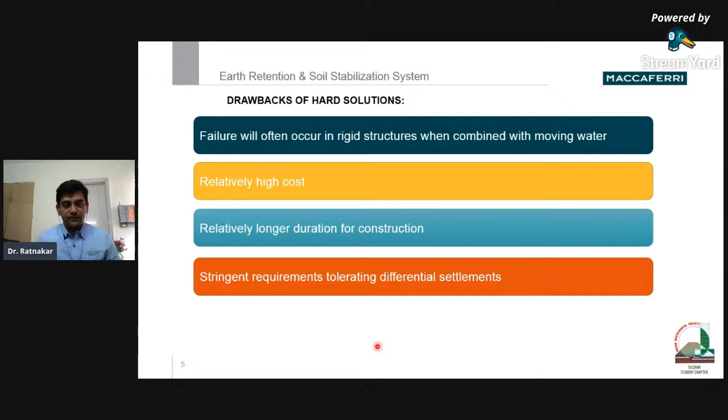As we discussed last time, earth retaining structures are either externally stabilized or internally stabilized, and externally stabilized structures are the gravity walls. In gravity walls, you have mass concrete, cantilever, and gabions. These typically are walls where you have filling done behind the wall.

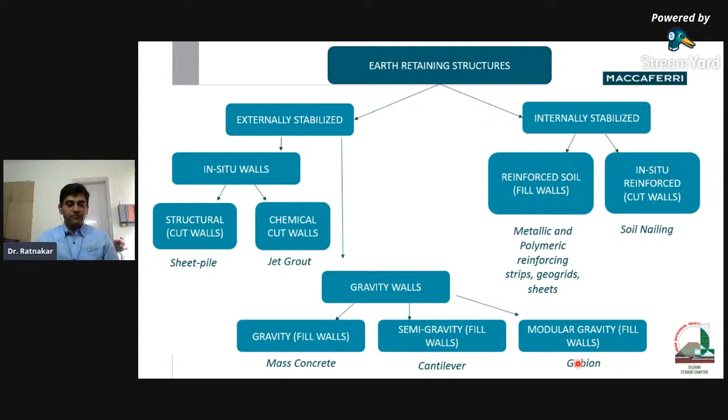In such cases, the gabion walls are being used. Now, before going ahead with gabion walls, let's understand what are the types of gabions.

I'm sure you must be aware of the history, but I will briefly mention it. Engineered gabions were invented around 140 years back by Maccaferri, in the application of riverbank protection. The word was Gabbione, and there was a patent for some time, and then the use of gabions spread not just in Italy but all over the world. Different forms of gabions have been used.

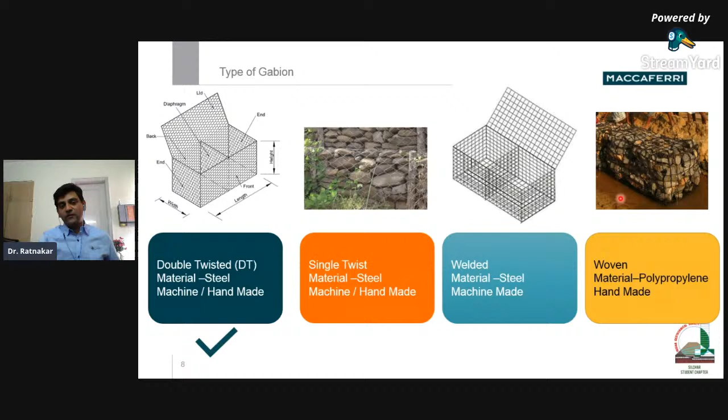Secondly, with a polymer rope gabion you don't have much stiffness, so it cannot maintain the intended shape. Typically the box kind of shape achievable in a double twisted mesh gabion or welded gabion may not be achievable specifically in a polymer rope gabion, nor with a single twist gabion.

Now, after understanding the types of gabion, it is very clear we are going to talk about double twisted, mechanically woven, machine made gabions. So what are the components of gabions?

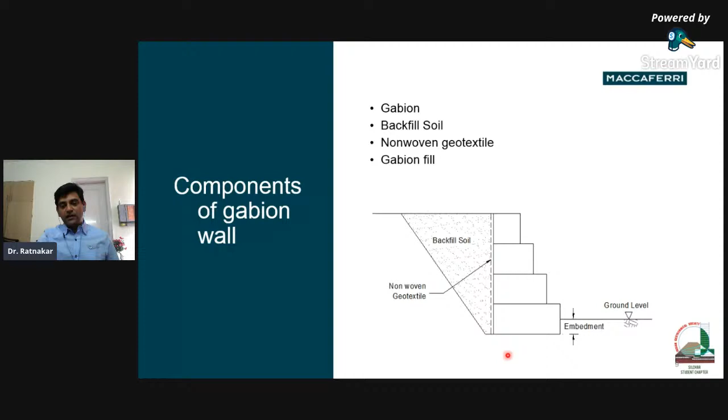Typically the first component is the gabion itself, like the number of gabions here. Second is the backfill soil, the soil which you are going to put behind it. Next is a dotted line representing a non-woven geotextile, which acts as a separator and filter. Then there's the gabion filling material, and the gabion wall rests on a certain foundation.

Let's look at these different components one by one. Gabions are rectangular cages made up of woven steel wire mesh, typically double twisted wire mesh. They have side panels, end panels, and top and bottom panels.

Diaphragms are provided every 1 meter to separate the number of cells. Lacing is used to join the lid with the sides of the gabion using a steel wire, and there are also selvedge and edge wires. That's what makes up the components of the gabion.

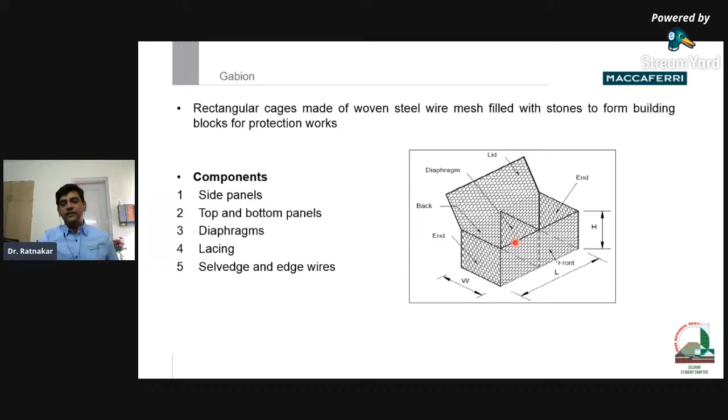This double twisted wire mesh is manufactured in many different sizes, allowing different fields of use and different structural strengths to be achieved. This is a double twisted hexagonal wire mesh. If you load these hexagonal wire meshes, you find there is a better stress distribution in hexagonal shape compared to rectangular or square shape.

What are the different mesh sizes of this steel wire mesh? Typically 6 by 8, 8 by 10, and 10 by 12 mesh types. The 6 by 8 refers to a mesh opening of 60 millimeters or 6 centimeters, 8 by 10 refers to a D value of 8 centimeters or 80 millimeters, and 10 by 12 refers to a mesh opening of 10 centimeters or 100 millimeters.

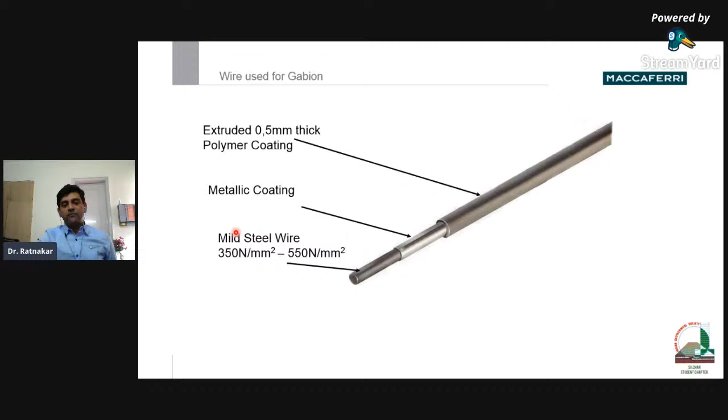These gabions are made with steel wire. You have a mild steel wire which has a tensile strength of 350 MPa to 550 MPa.

The requirement of this steel wire is usually that the elongation at break shall be more than 10%. This steel wire, if you are going to construct a structure with it, has to be durable, and there are possibilities of corrosion.

So corrosion protection is provided with a metallic coating. Typical metallic coating is basically galvanization using zinc, or now there are advanced coatings of zinc aluminum alloy, referred to as Galmac coatings, which have 3 to 4 times more resistance than just zinc coating. On top of that, polymeric coating is extruded, since even the metallic coating of zinc or zinc aluminum can also get corroded. So on top of that, a polymeric coating is provided.

This polymeric coating can be of a polymer which is flexible, which can sustain abrasion, and which can sustain the environmental conditions to which it is exposed. That's how you have the first layer of protection of polymeric coating, then a metallic coating, and then of course the wire itself. That's how the gabions are being made.

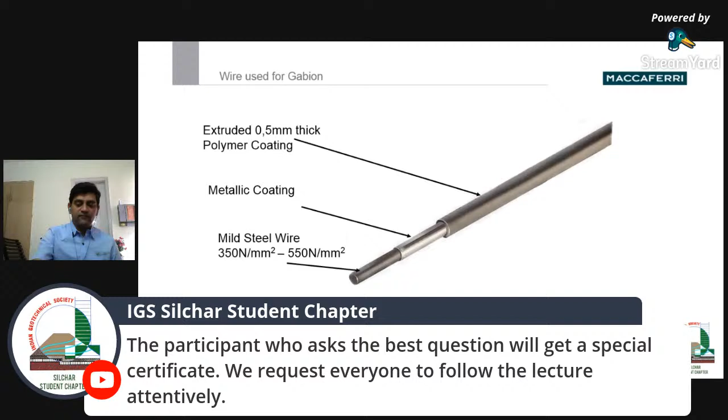Now these gabions have certain dimensions - length, height, and width. Typical length of these gabions varies from 2 to 4 meters. This is for standard gabions of 1 meter height. Sometimes even 1.5 meter long gabions are available, typically in 1 meter height. So for 0.5 meter height, typically you will not have this 1.5 meter length of the gabion. For 2, 3, 4 meter lengths, both 0.5 meter and 1 meter high gabions are available.

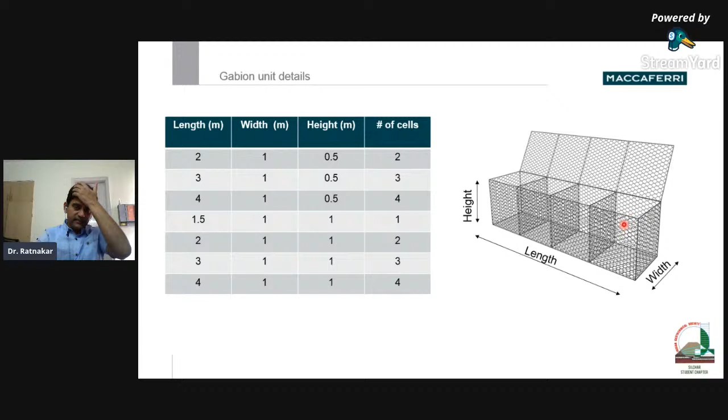So for example, if you look at the 4 meter long gabion like this one - 1 meter in width and 1 meter in height - it will have four number of cells, with three diaphragms separating these cells from each other. That's what the gabions are.

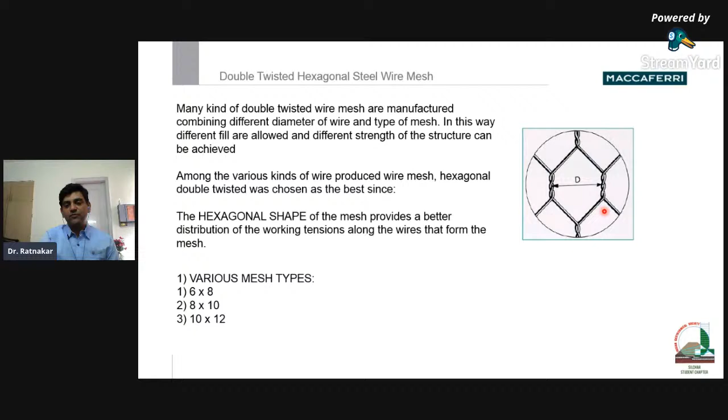Now, after understanding the gabion, let's understand the filling to be used. Typically a rock fill is put in, where the rock size is typically 1.5 to 2 times the mesh opening. So if you have D, the mesh opening of roughly 100 millimeters, you will need a rock of size 150 to 250. The reason for this size is simple - when you have rock in the gabion, if the rock particle is smaller than the mesh opening, it will come out. So for a 100 millimeter mesh opening, you need a rock element more than this, typically 150 to 250 millimeters.

The specific gravity can be 2.3 to 2.6 depending on the type of rock used. When filling these gabions, it is always recommended to overfill. So if this is 1 meter height, you need to fill at least 1 meter plus maybe 1 or 2 inches more, so that when closing the gabion, applying additional stress or force to close it makes whatever stones are inside properly packed. Otherwise, with loose packing, once you finish one gabion and put another on top, the stones in the bottom gabion will settle and you will not have a very good gabion structure - it will basically deform a lot.

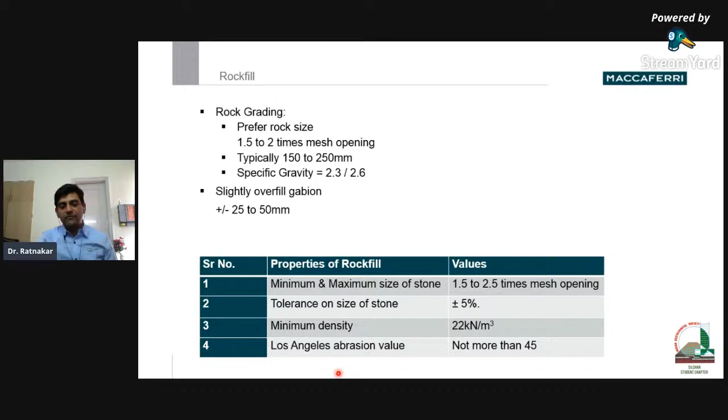That's why you need this. This is a general recommendation, but if you see IRCSP 116, it says the minimum rock fill size has to be 1.5 to 2.5 times the mesh opening, which is what I just mentioned. Tolerance on the stone size can be plus or minus 5%, it cannot be more than that. Minimum density is 22 kilonewton per meter cube, but this is not a fixed or rigid criteria. In case you are in an area where stones of this density are not easily available, you can use concrete cubes, or stones of lesser density, because it is part of the design. If you use lesser density stone, your structure will definitely be bulkier. And the stone or filling must have sufficient durability, which can be estimated through the Los Angeles abrasion value, which shall not be more than 45.

Now moving ahead, the next component is geotextile, which is usually placed at the back of these gabions. The reason why the geotextile is placed behind the gabion is simple.

When you place the stones in this gabion, there will be a lot of voids, typically in the range of 30 to 40%. These are acceptable numbers. You can even fill gabions with 50% or 60% voids, but it is recommended to fill between 30 to 40% voids. When you have a lot of voids, there are possibilities the backfill soil will get washed away, erode, or migrate through gabions and come out. To stop that, you need to have a filter here.

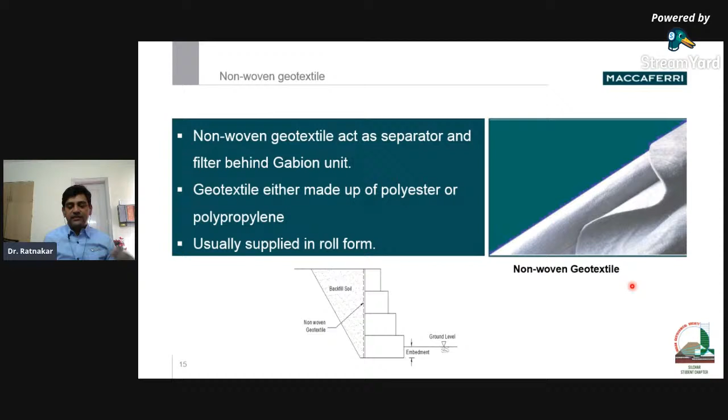That filter can be a simple non-woven geotextile. This non-woven geotextile will act as a separator and filter behind the gabion unit, and this geotextile can be made up of polyester or polypropylene. Usually this geotextile is supplied in the form of a roll, and this is a small component of these gabion walls.

Now after understanding the gabions, the components, and the type of gabions to be used, let's move ahead for the design steps. When you design these gabion walls, they are mass gravity walls, designed by checking various modes of failure, like ensuring the wall is safe against overall failure.

There is no slope stability issue. The wall is safe in the bearing capacity mode of failure, so your foundation soil has enough bearing capacity, the footing has enough bearing capacity so there are no settlements and movements. Also, we have to check that the whole wall, if it is a monolithic unit, shall not slide along the base, it shall not overturn, and most importantly - this is the part which most people don't do or ignore - is the internal check.

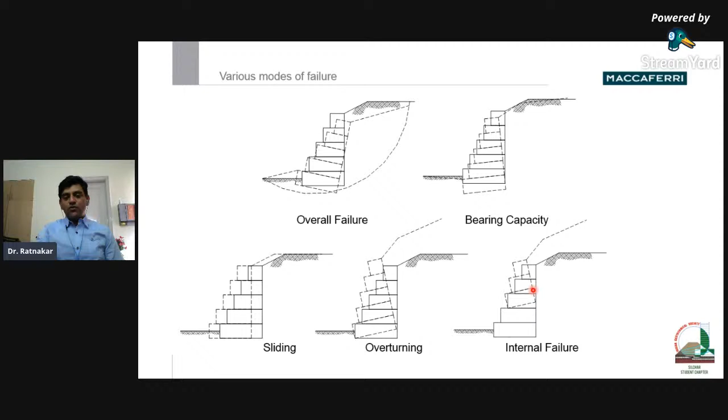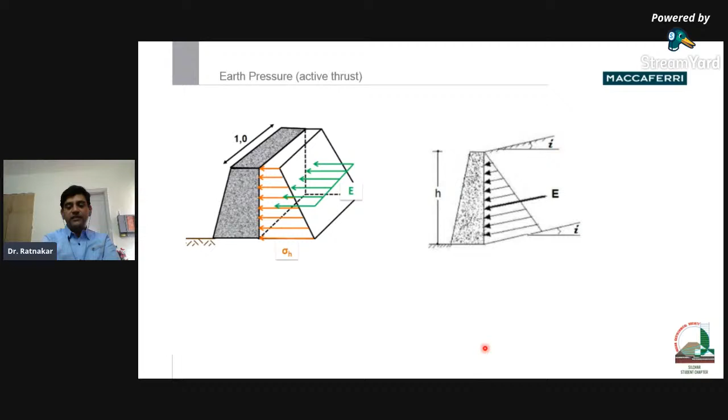So you need to check each gabion for compression and shear capacity. The first step for designing these gabion walls is to determine the earth pressure. We need to estimate this earth pressure based on the various theories available to us.

First of all, let's understand: if you have a soil element at a depth of Z from the top, and look at it from a retaining point of view, you have some vertical pressure, and of course there will be some horizontal pressure. This horizontal pressure is usually governed by the state of stress - typically active state and passive state.

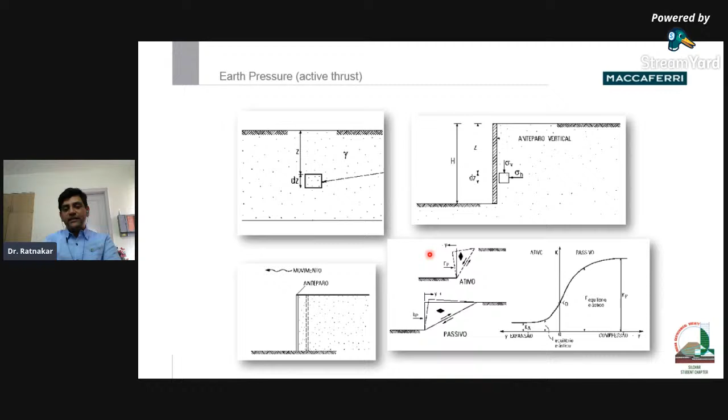When you have a retaining wall moving away from the backfill, or the backfill puts pressure and the retaining wall moves, it can be in active condition. Gabion walls are very flexible, so if there are high stresses, obviously there will be some movement. So in such cases you can use the active condition. Passive would be when the retaining wall is moving towards the backfill - a passive condition has to be used.

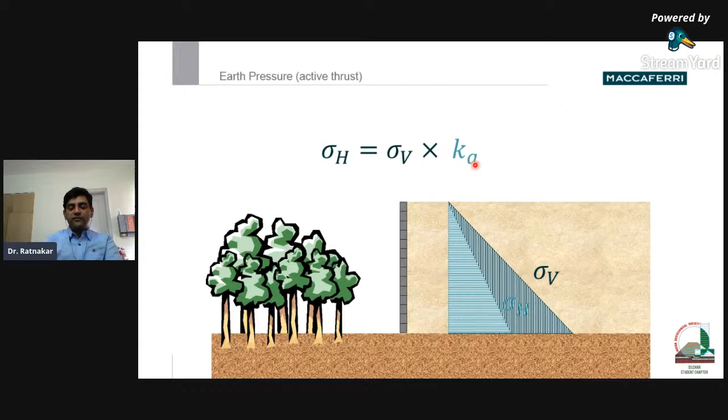For the active condition, you know the height of retention which needs to be retained, you know the density of soil, then you know the vertical stress - that is H into gamma, gamma H is the vertical pressure acting on the foundation. Then you can estimate the lateral pressure by multiplying by a factor called the coefficient of active earth pressure, Ka. For the coefficient of active earth pressure, there are theories available by Rankine and Coulomb.

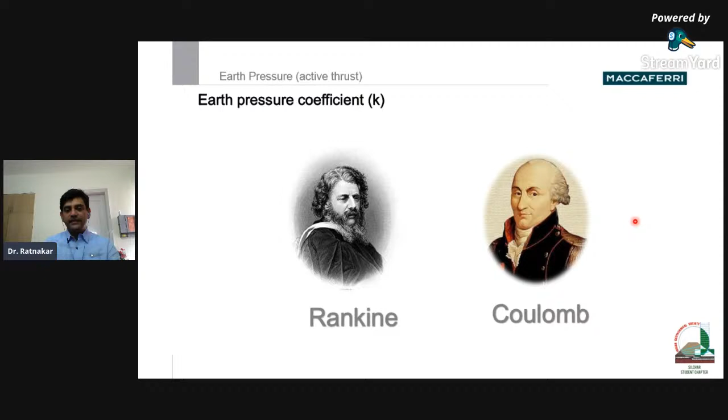It is very clear that when you go for these gabion walls, they are not going to have a smooth interface between this wall and the backfill. That's why you need to consider the Coulomb theory. In the Coulomb approach for estimating the earth pressure coefficient, you assume a wedge at an angle theta, where the mass of this wedge is W. Then you have the interaction between soil and the retaining wall, that's with the delta angle. That's how you do the analysis and find the pressure acting on this retaining wall.

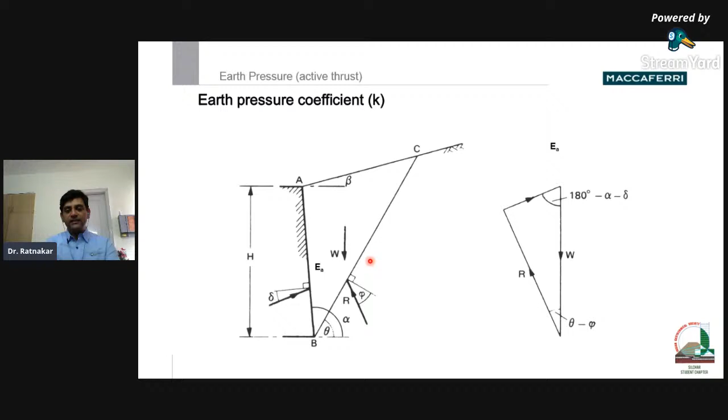Now this is a function of the failure plane, so you can have a number of failure planes and analyze it. For a standard analysis or typical case, you may take 45 plus phi by 2 and check that. But it is recommended you use a software program and find the maximum pressure yielded by a certain failure wedge.

Now, when we are determining this, we need not just consider the soil weight, but we need to consider the phreatic surface. If your retaining wall is going to be waterfront, or you are anticipating a lot of water gushing through this wall, then you need to model the phreatic surface. So let's say if it is a waterfront structure, you know the water level.

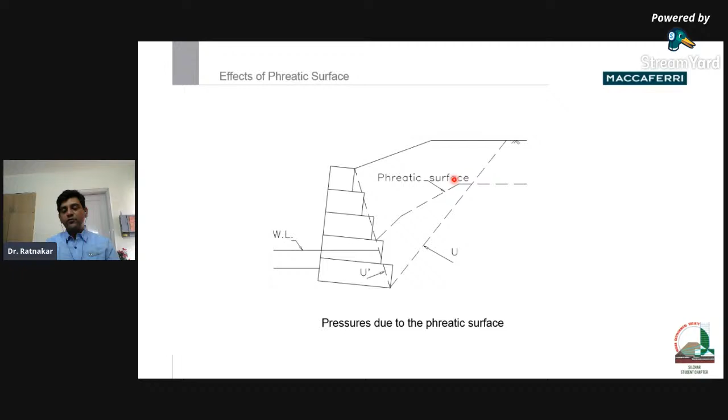You can assume some maximum water level depending on the high flood level, and then do a modeling of the phreatic surface and do the analysis for the effective stress condition.

On top of that, you need to consider the surcharge loads. If it is for road, it could be the live load from the road, typically 24 kPa. If it is railway, refer the railway guideline, but roughly 60 to 70 kPa you can consider. If it is for building or other application, like a car park of a mall, accordingly you can consider the live load.

Any concentrated load on top of that you need to consider while doing the analysis.

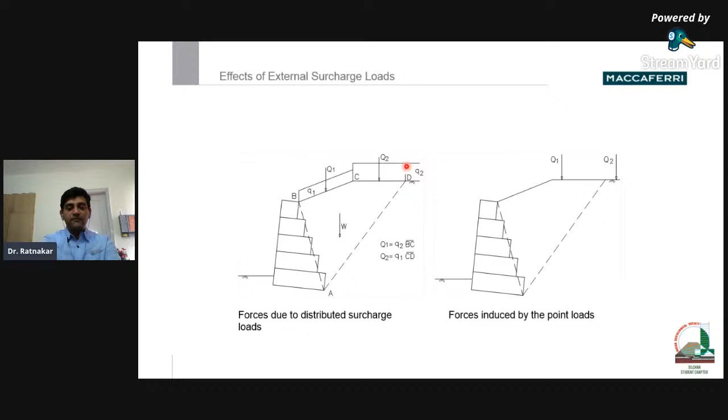In addition, India being seismically active, you will need to consider the earthquake loading. You can refer IS 1893. India is divided into four different zones: zone 2, 3, 4, and 5. According to the zone, you can decide the acceleration and apply it. For analysis of these walls in the seismic condition, you can use the pseudo-static method. You can go for the Mononobe-Okabe method and determine the earth pressure acting on it.

The resisting force here would be the resistance offered at the base due to the interaction of the gabion and the soil together, and the driving force would be the active earth pressure or active thrust. This resisting force is a function of the weight: mu W, where mu is equal to tan phi, mu being some percent or fraction of the tan phi value. So W tan phi into mu would be the resisting force.

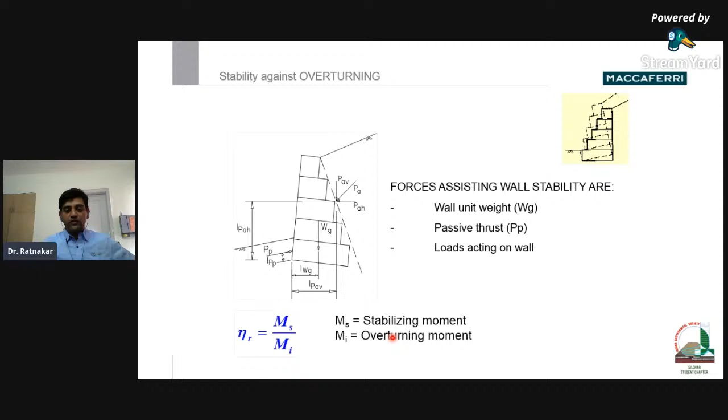Now, the next check is about overturning. You assume this whole body is a rigid body with some forces acting on the wall, typically earth pressure, and consider rotation of the retaining wall at the toe and do the moment analysis. That's how you get the stabilizing moment versus overturning moment. You do the analysis and get the factor of safety against overturning.

Next is about the pressures. When you construct these Gabion walls, it exerts pressure on the foundation. Usually you can use Terzaghi theory or any other theory for determining the bearing capacity. As this retaining wall is long enough, you can consider the footing as a strip footing. The parameters for the foundation soil have to be considered. If it is layered soil, you will need to model the layered soil in software, or if doing hand calculation, use engineering judgment whether to use the soil properties of the layer just below or take an arithmetic mean of different properties depending on site condition.

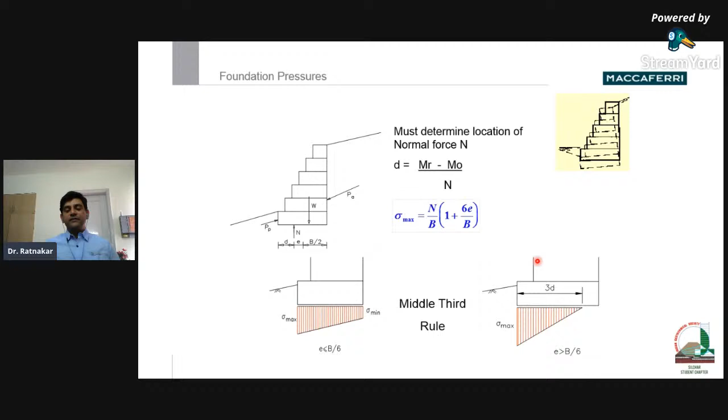We need to keep in mind that the design shall be such that the wall never experiences any tension - this is called no-tension analysis. For that, the middle third rule is to be followed: the resultant shall fall within the middle third of the Gabion. We can follow this equation: normal load divided by width, multiplied by (1 plus 6e by width), where e is the eccentricity between the center line of the foundation and where the resultant is acting.

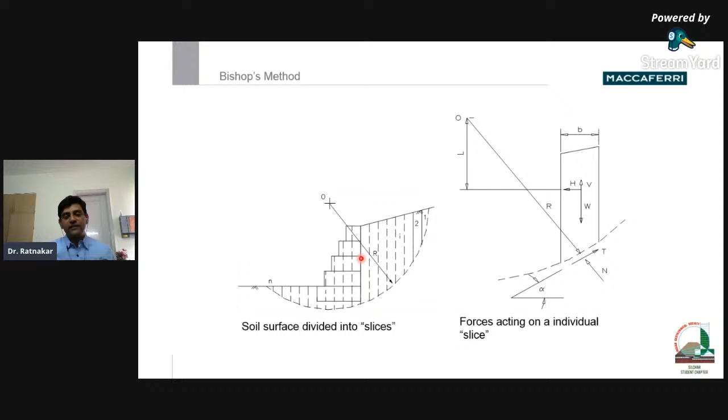Moving ahead to slip surface analysis, there are a number of methods available - it could be Janbu's method, generalized limit equilibrium, or anything. I recommend doing a Bishop's analysis; it is quite simple and accurate compared to other methods. There isn't much variation between the factor of safety from Bishop's method versus generalized limit equilibrium or other methods. You consider some center of rotation, have a circular arc, divide the whole mass into a number of slices, solve Bishop's equation, and finally get the factor of safety for global stability.

The most important part, as I mentioned, is the internal stability. While analyzing these Gabion walls, we've seen the sliding, bearing, overturning, and global analysis, which is common for any kind of retaining wall. Like in RCC, we do steel design or concrete design, but in Gabion wall, there is something called the internal stability, because of the soil pressure and the self weight.

Each layer of the Gabion will experience some compression and shear due to the soil thrust and surcharge load, so we need to check the shear and normal stresses. Typically tau equals T by width B acting at that layer, and we have to ensure this is within permissible values. The normal pressure sigma will be N by 2D, acting over the effective width of the Gabion at that layer. We need to again check whether it is within the permissible limits of the Gabion.

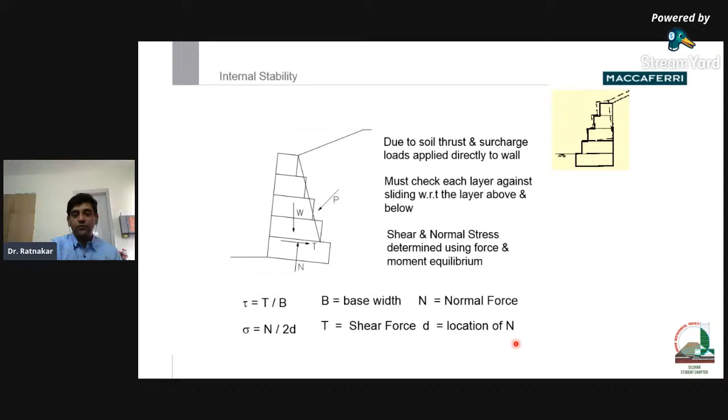So how do we determine this? What is the permissible limit for the Gabions? How much can the Gabions take in compressive load? What will be the sigma admissible? How much would be the shear capacity of the Gabion? Research and development was taken up by Maccaferri around 1970.

In 1979, the first phase was compression and shear test, and the second phase was on the full size retaining wall. The aim was to determine the strength and deformation parameters of the Gabion, verify the first phase results, and establish the most appropriate calculation parameters for the limit of application.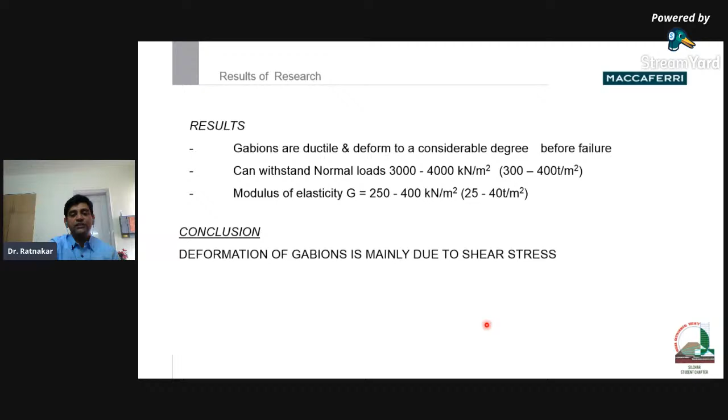The gabions can withstand a normal load of 300 to 400 ton per square meter, and the modulus could be 25 to 40 ton per square meter. And more or less, we observed that shear is the cause of the deformations of the gabions.

The most important part when we do this analysis is that we require usually two parameters: cohesion and friction angle. You can imagine, if you have stones and try to stack them like this without the gabion, they cannot be stacked. Now with the gabion, you are able to make a vertical shape here. That means there is some overall cohesion effect being added to the stones. Otherwise they could have been in a triangular, pyramid shape, and that angle could have been the internal friction angle of the rock itself.

But now the effect of this mesh is encountered, or considered in equation form, which is related to the mesh weight per cubic meter of wall, and that's how it is done. Similarly, the internal fictitious angle of this gabion and the rock together was determined, which is related to the density of the gabion. This is the formula.

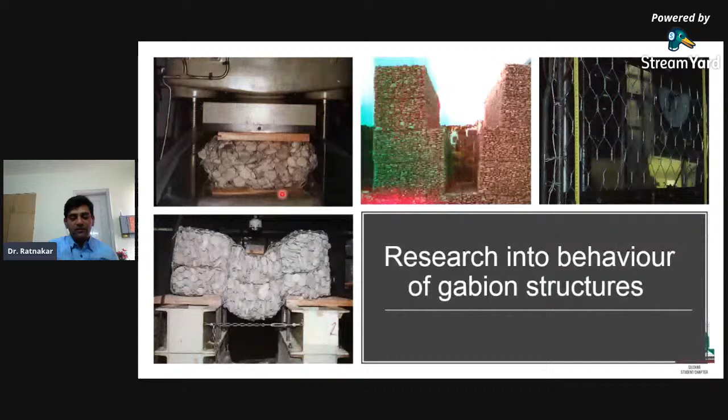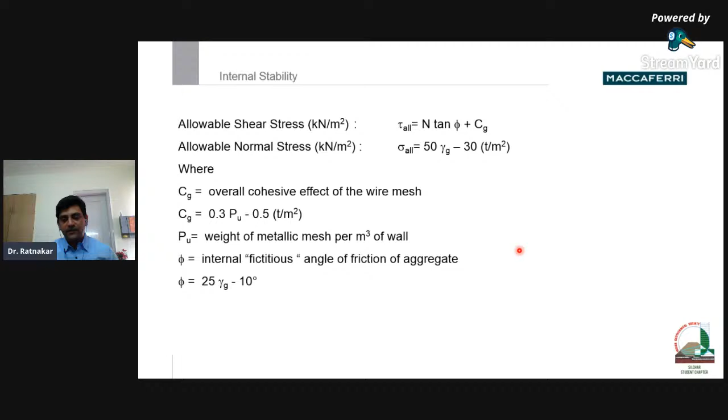Now keep this in mind: whatever testing is done is based on some wire mesh produced by Maccaferri and tested for certain parameters. So obviously these parameters are applicable to the gabions produced by Maccaferri, and you can imagine the kind of extensive research done based on the compression test, full wall monitoring, the behavior, and other parameters of the mesh. You can use these parameters in your analysis for doing the internal stability.

Of course, these are the recommended factors of safety as per IRC 116. Before IRC 116, there was no single document which could give all kinds of factor of safety.

There is one IS code which gives these factors of safety, but IRC 116 is the latest one, where for global stability, for static case it could be 1.3, seismic case 1.1. If you are using these walls directly for bridge abutments or buildings, you can increase the factor of safety to 1.5. When you check for sliding, it could be 1.5.

In the static seismic case 1.125, overturning 2 and 1.5. For bearing capacity, if you are considering for walls, it could be 2, and 2.5 for abutments or buildings or important structures. Internal stability 1.5. For seismic case, again it is 1.125. So this is the target number of factor of safety which you can target.

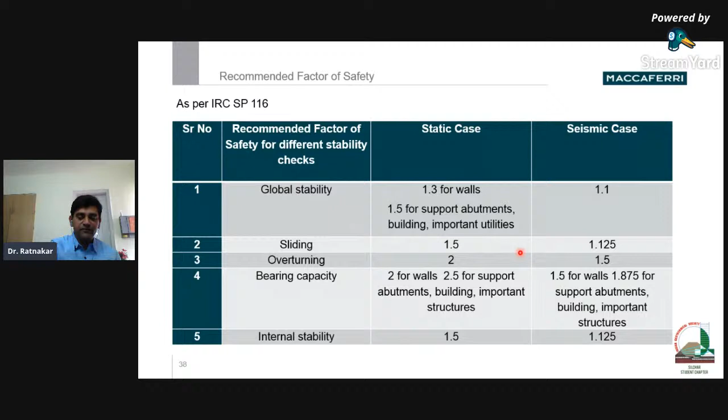Now, after understanding this, how to analyze sliding, bearing, overturning, as well as global and internal stability, some points we need to remember: you can have the walls stepped out or stepped in. Typically, when going stepped in, it is recommended to have a 6-degree batter.

When you are providing gabions, never provide gabions with irregular wall rear surfaces. For example, if this is a gabion of 2.5 meters, on top of that you again put a 2.5 meter with offset on the back side. This is not good practice because there will be some additional stresses coming on this gabion due to the soil pressures, and the behavior would be different. So avoid these irregular wall surfaces.

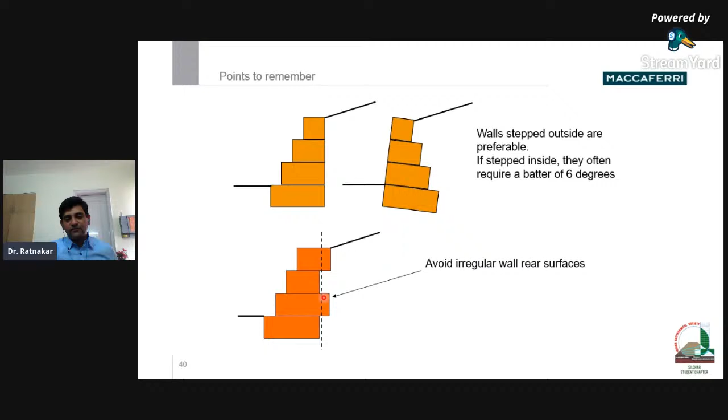Sometimes people tend to stack the gabions just over one each other. That means you have a 2 meter gabion, you stack over top of each other, making it 90 degrees. So this is not a wall. This is just you are putting some kind of cladding, and this is not the conventional retaining wall. So do not consider this as a retaining wall. It's just a fascia or a cladding you are doing.

While providing the non-woven geotextile, sometimes people tend to provide the filter at the bottom also, but here it's not really required. Typically for normal retaining walls, you can provide just the filter at the back. If there is a moving waterfront structure, and in the portion in front of the wall, any protection you are giving, there you can provide the filter, but usually you don't require this non-woven geotextile at the bottom.

The reason for it: the moment you are introducing a filter between the gabion and the soil, there is a reduction in the friction between the gabion and the soil. So there will be reduction in the resistance because the friction between the gabion and the soil will be reduced due to the presence of geotextile, and your structure will become very bulky from a sliding point of view.

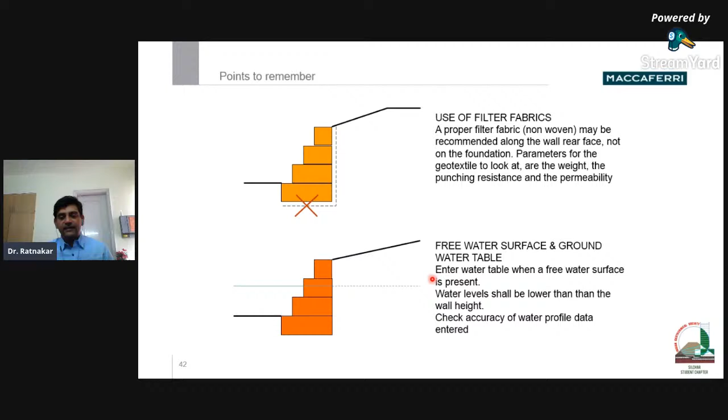While modeling the groundwater, you have to model, let's say, stagnant water you are encountering. So here it is better you model the fluctuating water level, as accuracy of the water data is important. Fluctuating means the critical condition would be water level outside the wall lower, and the phreatic surface at higher elevations inside the backfill. This would be the worst condition, so you can model that.

While checking the overall stability, you need to consider what are the slope inclinations in front of the wall and the back side of the wall, and then you check the overall stability.

Sometimes people have a tendency to use a kind of shear key or foundation key at the gabion foundation, but this is not required. If you require something to optimize the foundation, instead of providing a shear key, you provide a little wider base with a projection on the back side, at the toe and heel side of the gabion wall. This would be fine.

If you intend to provide a very long base of the gabion with only this wall condition, this is not going to serve the purpose, because the load distribution typically happens at 45 degrees, and the rest of the gabion will be wasted. It will not be much useful. So don't extend these bottom units too much beyond. If it is 1 meter height, you can go 1 meter on the backside, not 2 or 3 meters.

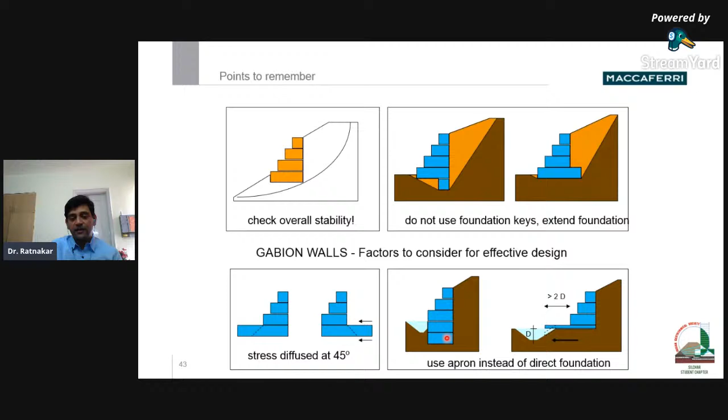When you are encountering waterfront structures, you will be required to protect the wall from scour, because over a period of time scouring will happen, so you will need some embedment. Usually the designer will have an option to go deeper and provide a deeper foundation, or alternatively have a shallower foundation but provide an apron in front. This would be cheaper and easier to implement. We recommend this option rather than going deeper and creating a lot of instabilities and difficulties in construction.

Now, whatever we discussed about the design, what are the codal provisions?

So you can note it down. IRC SP 116 talks about guidelines for design and installation of Gabion structures. It is published in 2018. This is a very good document. It covers not just Gabion retaining walls, but also apron design and the use of these Gabion structures for erosion control, typically in rivers.

That is also covered. IS 14458 Part 2 deals with retaining walls for hill areas, giving guidelines for design of retaining and breast walls. Here some portion of design of Gabion walls is covered, but IRC SP 116 is more detailed.

IS 16014 is the standard which gives material specifications of Gabion. IRC 89 is the latest standard, which talks about river training and control works for bridges. Here again, the standard deals with various solutions including Gabion.

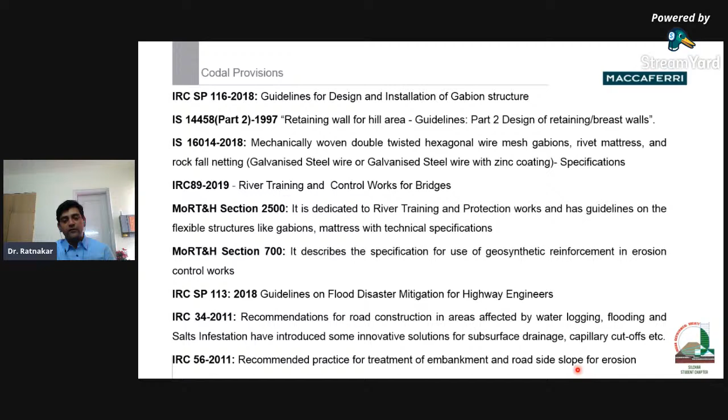MoRTH Orange Book section 2500 and section 700 cover these products, with 2500 specifically for river training and protection works. IRC SP 113 is for flood disaster mitigation, which includes use of Gabions for different applications. IRC 34 covers road construction in areas affected by waterlogging or flooding, where the use of Gabions is also covered. IRC 56 is the recommended practice for treatment of embankment and roadside slope erosion, where recommendations for use of Gabions have been given.

Now, after understanding design, after understanding codes and what is to be done, the question comes: how much is the carbon footprint of these structures? So let's consider Gabion walls versus a concrete wall. A detailed analysis is performed from material manufacturing.

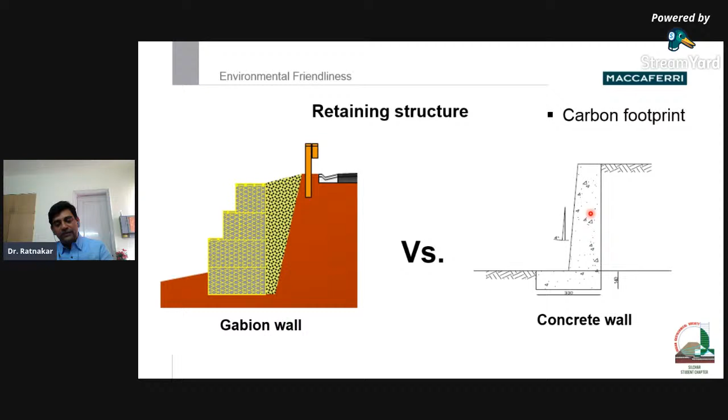That is, wire being manufactured, shipped to the plant for making the gabions, then shipped to site and installed. Same for the concrete wall: the quarrying of lime, processing of that lime into cement, crushing of stones, transportation of that to the construction site, making concrete and putting it in place, including the steel inside the concrete wall.

So if we do this calculation and find the emission of carbon for the concrete wall versus the Gabion wall, you will see a very high carbon emission, around 50,000 kg CO2 equivalent being emitted for a concrete wall.

Now let's look at the construction steps. I will just take you to an animation where I am showing some construction steps.

So for the construction steps, the first step is about the Gabion bundles. You receive these Gabions in the form of a bundle, and they are color coded. Different sizes are there: 4 by 1 by 1, 3 by 1 by 1, 2 by 1, something like that. You will receive these Gabion boxes in a folded form at the site.

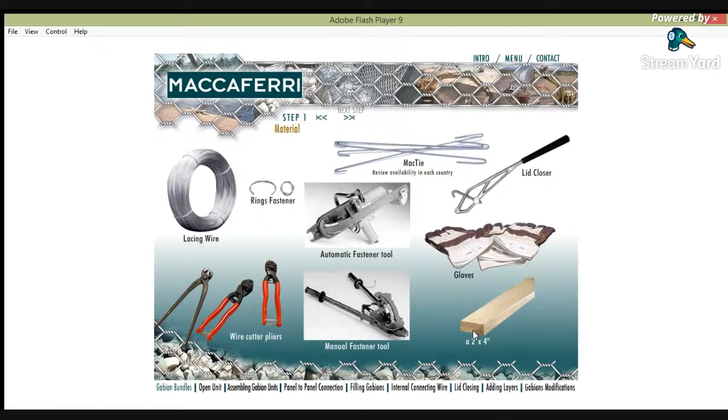Before you start construction, you need a lacing wire, wire cutters and pliers, a wooden rafter, hand gloves, and a lid closer. If you have the lacing wire, you don't need mac ties, or if you have mac ties, you don't need the lacing wire. Same with rings and fastener: if you are using lacing wire, you don't need these rings and fasteners. Automatic fastener tool and manual fastener tool are used if you are using these rings, but if using lacing wire, just pliers is fine.

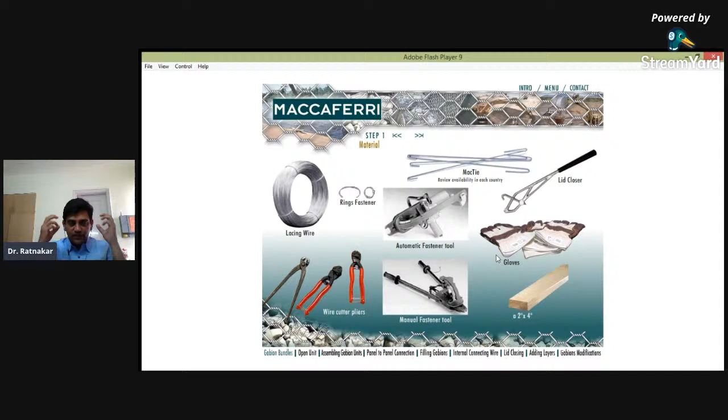So in India, mostly the lacing wire, pliers, wooden rafter, and gloves are enough for working. And of course, for protecting your eyes, you need to wear goggles during the construction of these Gabion walls.

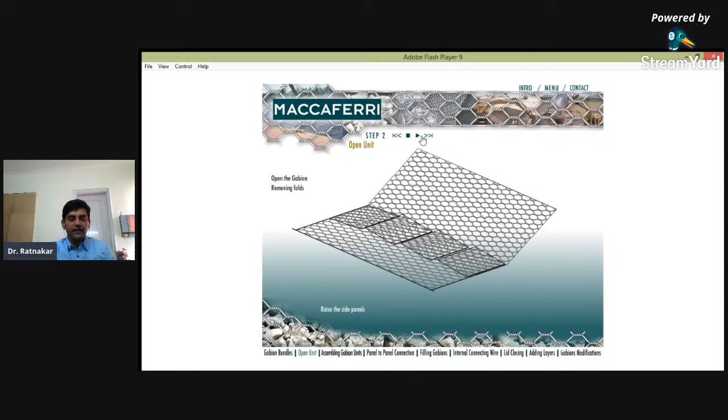So first, whatever Gabion you receive in a folded form, unfold it, put a wooden rafter below it, and then remove the fold. You will have the end panels, top panel, bottom panel, side panel, and lid and diaphragms - this is what the Gabion would be. Then you assemble this Gabion, make the sides together. At the edges you have extra wire, you can just twist it and make this Gabion mesh into a box form.

Then you have the tying of these side panels together by lacing wire, typically in the double and single fashion. You take a steel wire, two turns and then a single turn - that's called the double and single turn pattern. You join the diaphragm and join the two boxes together also with the same process. That's called the lacing procedure.

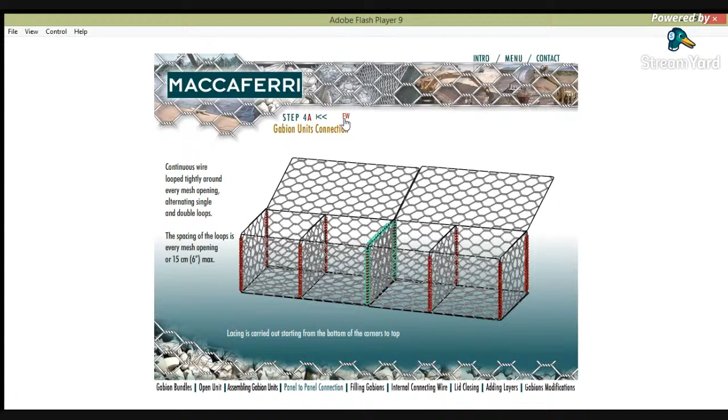If you are not using the lacing wire, you can use simple clips as the alternative. After that, your boxes are ready. You can put multiple boxes together and join them.

Then you bring your stone depending on the mesh size, as I mentioned, 100 to 200 millimeters. Fill this gabion to roughly one third height. If it is a 1 meter high gabion, you fill it up to 0.3 meter like this. After finishing the first one third layer...

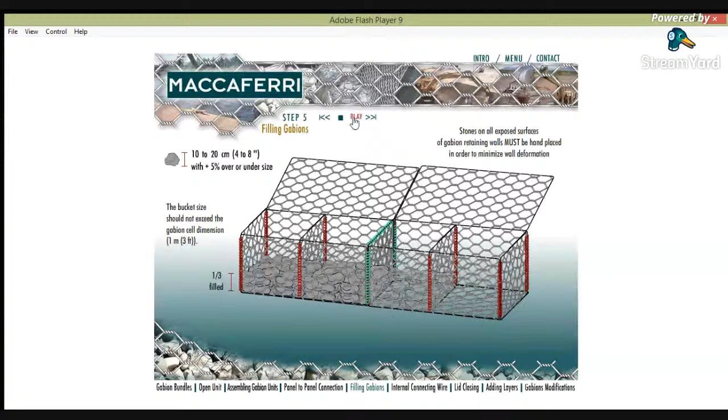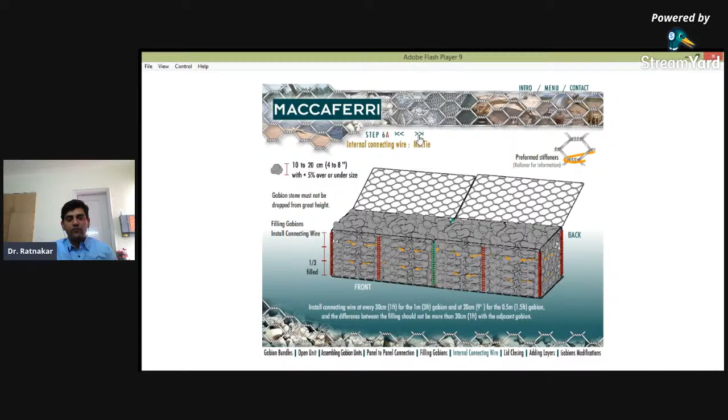After that you can go for the filling process, but keep in mind while filling you have to follow a certain process - you cannot have this box completely empty and this box completely full. If it is done, the diaphragm here will deform. After the first filling of 0.3 meter, you need to place the stiffeners - additional wires here - and then go for the next one third and next one third. As I mentioned earlier, you need to overfill these gabions roughly by 20 to 40 millimeters so that there are fewer deformations happening in the gabion wall.

Alternatively, you can use steel wire to make these kinds of ties. Same process, and then fill it.

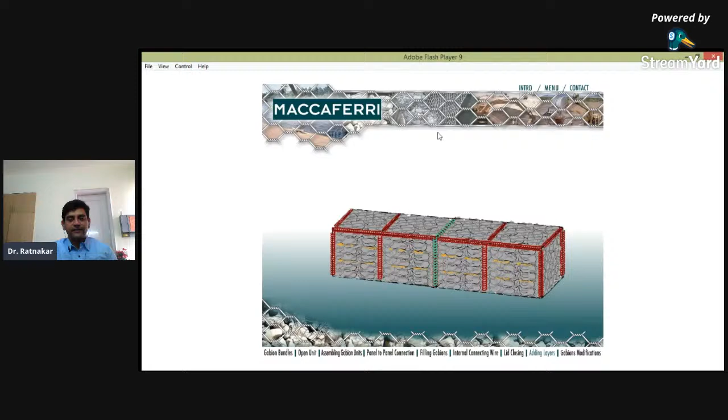So you have a retaining wall. You have one box here, you have another box, you can join them together. Fill it with stone, have the bracing, fill it with this, then the next wire, and then you have a geotextile. Then you put soil in a number of layers, then compact it, then gabion.

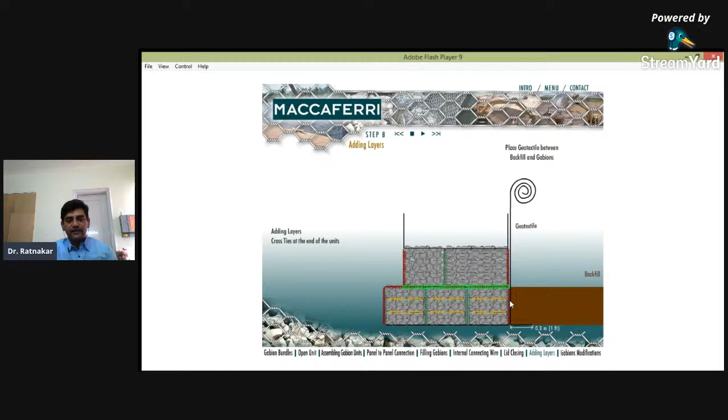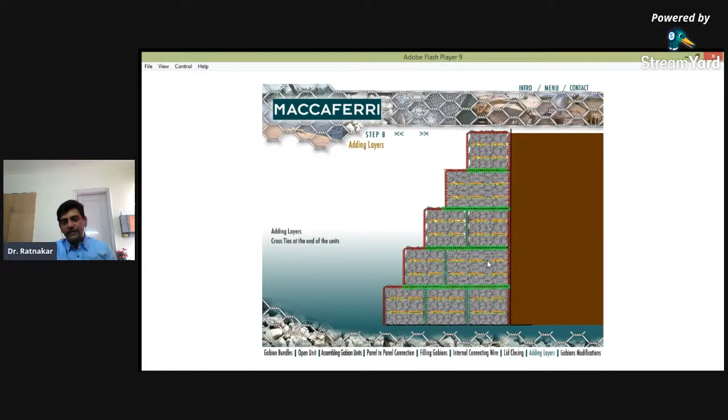Then compact it, then fill in gabion - it shall not happen that you make a full gabion and then put backfill later on. If you do that, your gabion wall will rotate. It is always recommended you fill the gabion with stones first, 1 meter, then put the soil, compact it, then you have the next gabion, next gabion. That's the way you need to proceed.

So this is a very simple method of filling the gabions. Let me go back to our presentation.

After construction steps, let's understand some case studies. As the time is limited, I will not be talking on case studies much because there are a number of case studies all around the world. We started working around 140 years back, and maybe thousands of structures have been built worldwide. I would like to show you very few selected case studies.

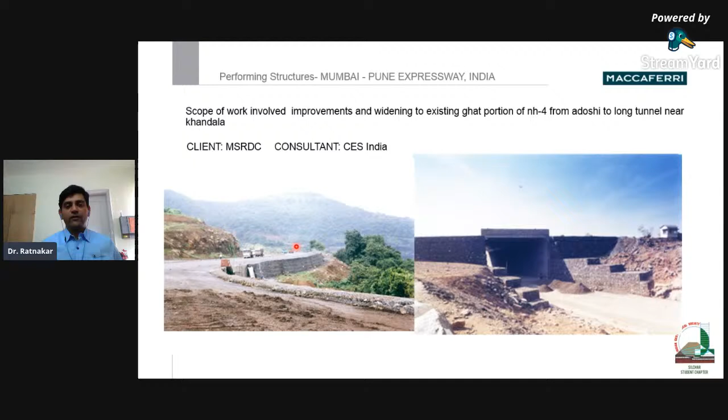This is one case study along the Mumbai-Pune Expressway, where the scope was improvement and widening of the existing road section on NH4. You can see the gabion walls here. The reason for adopting these gabion walls in Mumbai-Pune Expressway was that it passes through the Western Ghats, and the stones coming out from the excavation were used to fill the gabions themselves. This is the first expressway in India, and these retaining walls have been performing very well since then.

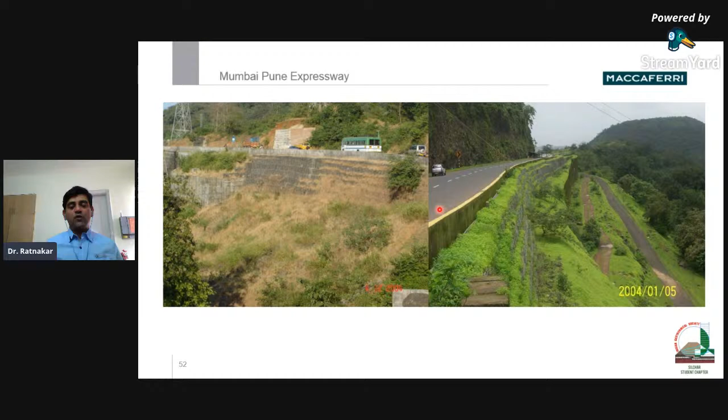This is a very good example showing that even though we say it is a flexible structure, these can be used to support rigid pavement kind of structures also. It's a matter of how you design the walls and how you construct the walls - these walls can behave really well.

Another example is Konkan Railway, which established a rail track in the Konkan region passing from Mumbai through Goa to Kerala, where the terrain is very treacherous. It passes through a lateritic zone where the soil is strong when dry, but when it gets wet, lateritic soil loses its strength, and Konkan Railway faced a number of slides during monsoons.

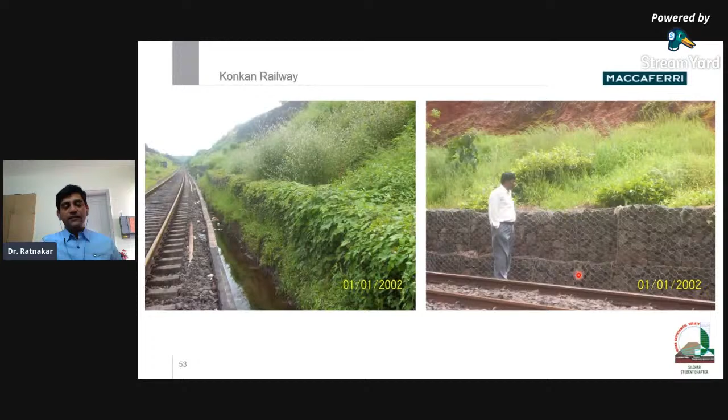One such slide was treated first with gabion walls, and in this photograph you will see no gabions present - the structure is so beautiful that the gabions completely blend with the environment. This was the wall just after construction, and this is how it has completely blended with the environment. Being a porous kind of material, it allows water to drain very easily. That's why these retaining walls are preferred where you have heavy rainfall and challenging soil conditions.

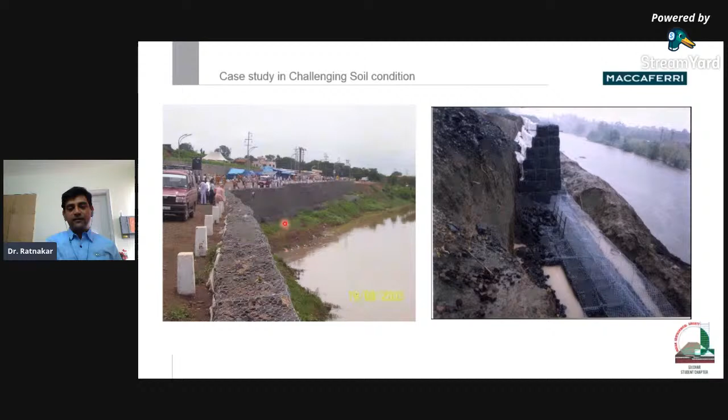Another challenging soil condition - this is a project from Nashik, Maharashtra, along the river Godavari, where a retaining wall was to be built. The soil conditions were poor, with a phi value of roughly 20 degrees and very low cohesion. Here the gabion walls were built - you can see this during construction, and this after construction in the year 2003, and this roughly 10 years after construction, around 2010 or 2012.

Very beautiful gabion walls merging with the environment. Like this, a number of gabion walls have been built by Southern Railway.

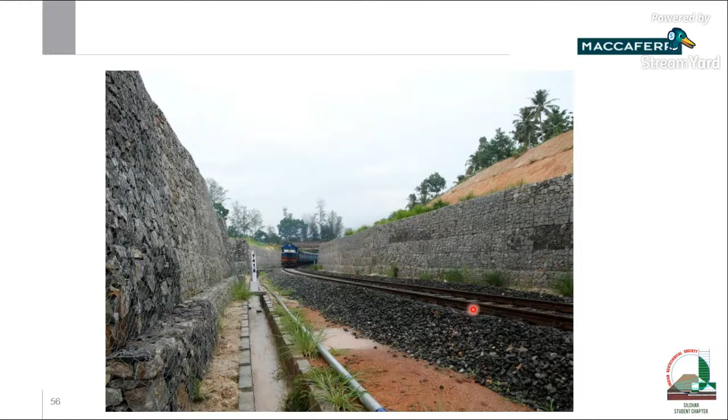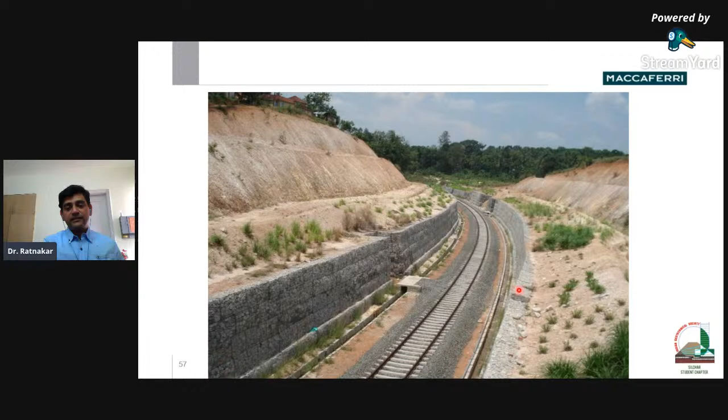Extensively, railways have used these Gabion walls, especially in areas of heavy rainfall. It's not just the Himalayas, but it has been used from north of India to the complete south, extensively east to west. Very beautiful Gabion walls have been constructed. There's another project from the southern part of the country, Gabion walls for landslide or slip stabilization.

Overall, there are four different paradigms. These Gabion walls are flexible, and basically they are structurally continuous. If we see rigid structures, typically concrete structures, when there is moving water, there are possibilities of failures. But these flexible structures, being porous and easily allowing the movement of water, stand against erosion. Undermining is definitely controlled by providing proper aprons, and these structures can tolerate settlement without damage. In rigid structures, the failures could be sudden.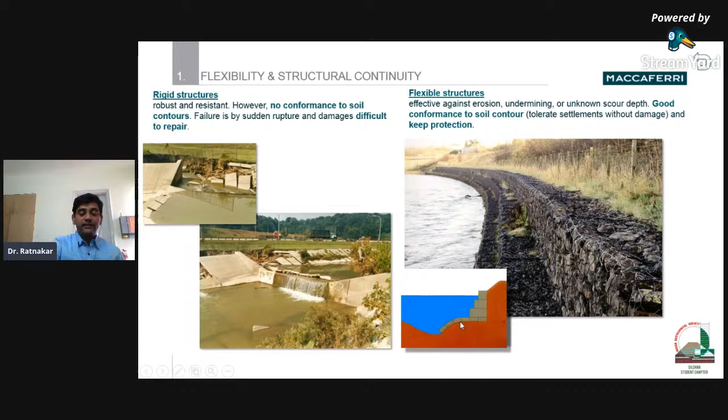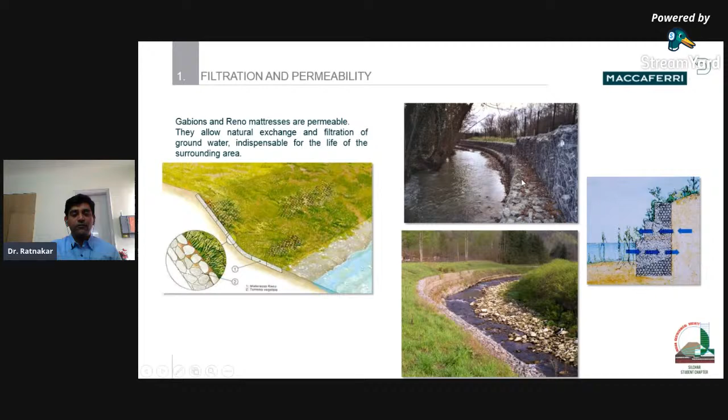If there is erosion, these flexible materials can adopt or take the shape of the eroded surface. They have very good filtration and permeability, so water can easily enter and come out of the structure. It's so permeable that there is a natural exchange with the surrounding environment and filtration of groundwater. Usually, after a few years, if it is a very good environmental condition, the gabion will be completely gelling with the environment, and you will have a lot of vegetation coming.

Okay, the next point is filtration and permeability -- this is what we discussed. After that, durability.

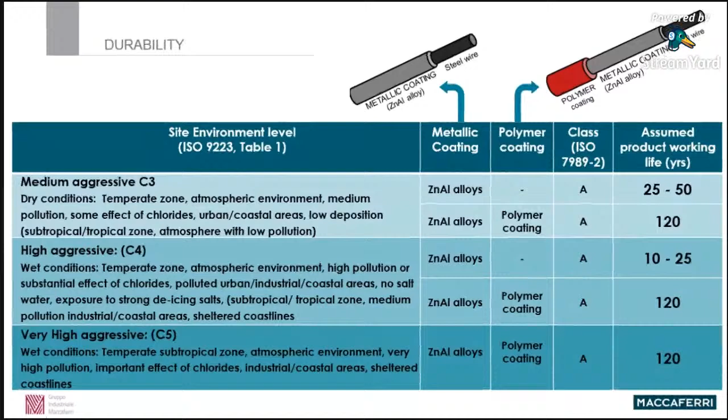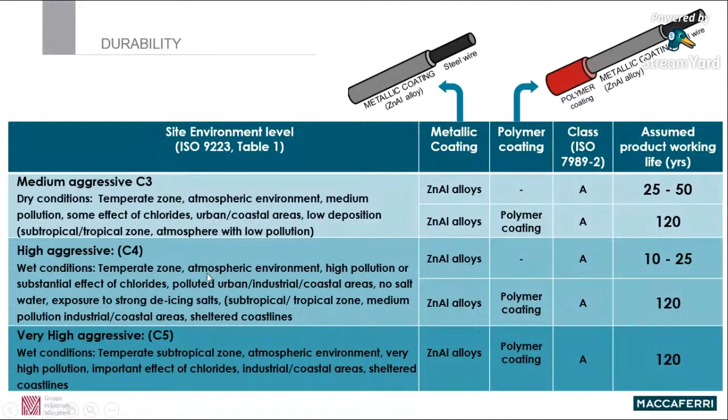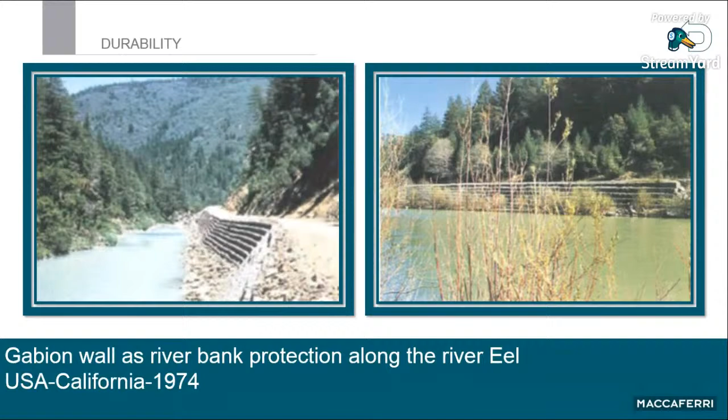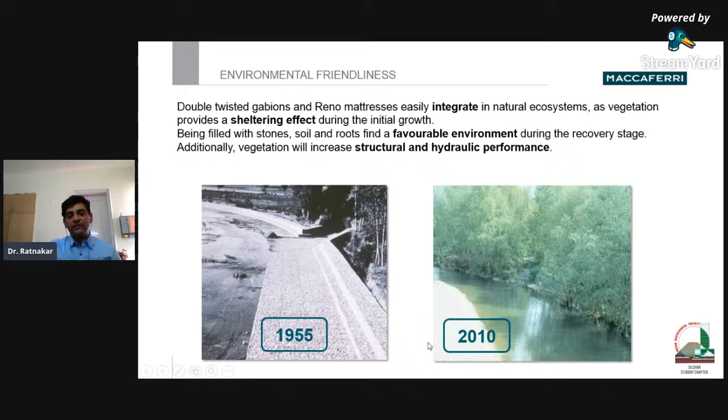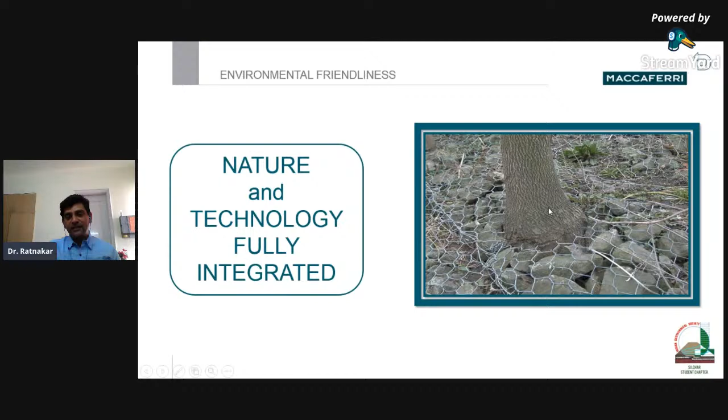Then the last point, environmental friendliness. These structures are environmentally friendly. The Gabions and mattresses easily integrate with the natural ecosystem and provide a sheltering effect. Being filled with stones and having voids, soil can get easily deposited, which is favorable for the environment and recovery stage. This structure was built in 1955, and this is in 2010 -- now you cannot see any stones there. Even this is an interesting case where you have a tree coming from the mattress itself. The tree trunk has completely engulfed the mesh, so it is fully integrated with the environment.

In summary, these structures are low cost elements, very simple and efficient to install. No specialist workforce or skilled manpower is required for these gabion walls. They are economical compared to conventional retaining structures and faster in construction. I would say they are all-weather materials -- you can use gabions during monsoon also for construction, unlike concrete, which cannot be done during rainfall. Once they are nicely filled, aesthetically pleasing structures are achieved, and if we use proper tested material, this will help in achieving the required design performance.

Over these last 13 years, a number of people have mentioned to me that gabions are failing here, gabions are failing there. I always tell them: have you installed the structures as per design, and is the design correct? After that, whatever parameters you considered in the design, are these being used in the field? For example, whatever parameters for internal stability I showed, do the gabions being used have these parameters? You cannot just use any gabion and apply some other parameters to the design -- the relevant parameters have to be used.

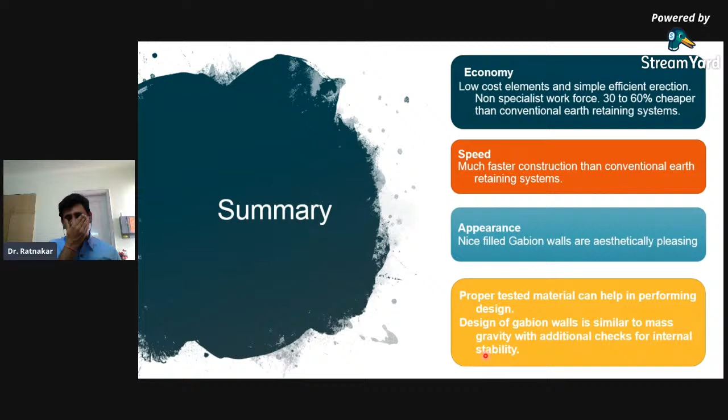This design of Gabion walls is similar to mass gravity structures. In addition, you need to do internal stability checks, that is the shear and compression checks, and that's how you can ensure the proper designed structure.